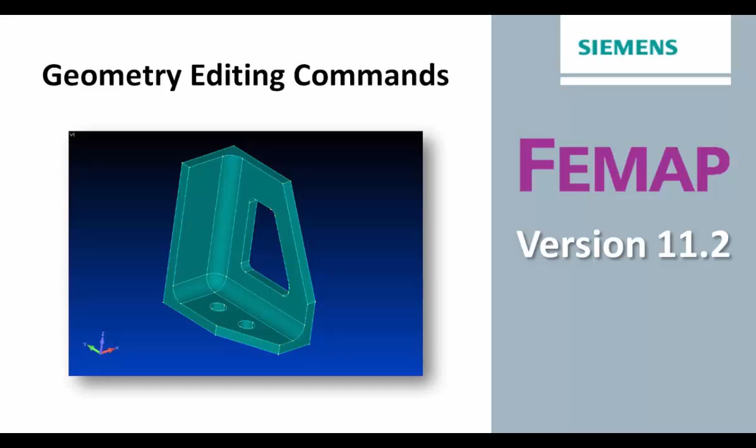This will be a short video covering some of the geometry update commands we've added to Femap version 11.2, using a very simple part from an older Femap example.

Under feature editing, we've added some new tools called Edit and Offset Surfaces. Edit will basically, on a planar surface, move it in the direction normal to the plane. On a cylindrical surface, it'll edit the radius, same thing for a spherical surface. And on blends or fillets, it'll actually allow you to edit the value of the blend.

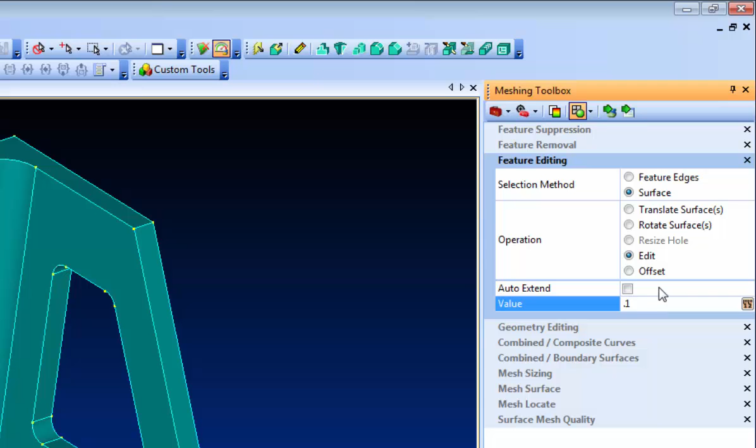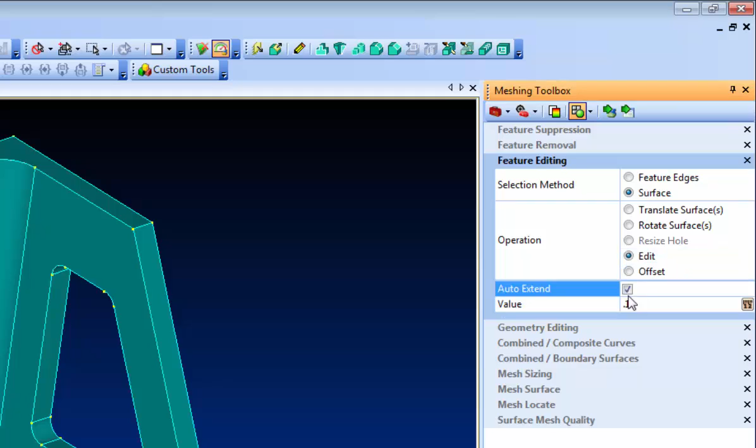There are two key things to look at here. There's an auto extend option, so let's do a quick example. Let's say I'm going to make the planar surfaces 0.1 thicker. If auto extend is off, it just picks one surface at a time. Going to front mode, you'll see one surface at a time doesn't make sense for a lot of things, though it comes in handy for other edits. So planar will just move that surface in a direction. If you turn on auto extend, it goes and gets all connected tangent surfaces and moves everybody together.

Same thing's true when editing a cylinder's radius. If this is turned off and I pick a cylindrical face, it shows me its current value, and you type in the new value. If you only pick one without auto extend, you do one at a time, so you get some interesting shapes. If auto extend is on, and this is set to 0.3, it will auto extend and change them both to 0.3 at one time. So with auto extend on, you get everything connected; with it off, you get just the one at a time. It's a pretty quick way to change blend radii.

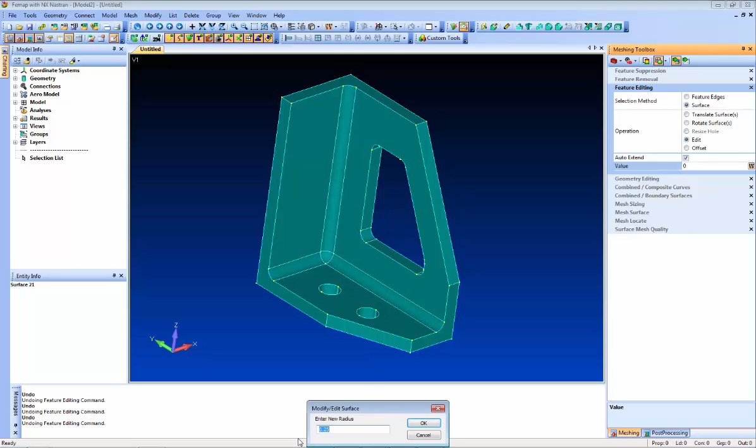I'll go back and make it 0, and when it's 0 and you pick a surface, it goes and gets its current value and asks for the new value. If I type in 0.25, the blends all update to 0.25. Now if I do it again, make it 0, pick one, it finds all its friends, and if I override and say I really want to make it 0, it's going to remove the blends. Now they're gone.

For a part like this, let's say you want to make it a little thinner. We can just edit, type in minus 0.1, and go pick that face, and that face. You see it's updating everything automatically.

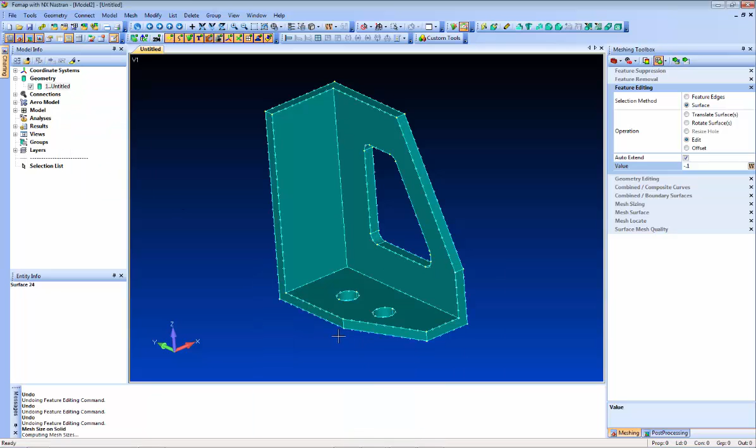Now remember, this is in the meshing toolbox. So if this part was actually meshed, I'll go ahead and mesh it with a dummy mesh. Setting the mesh size now, I'll say tet mesh. What material? Just pick something, we'll go aluminum. So now it's meshed.

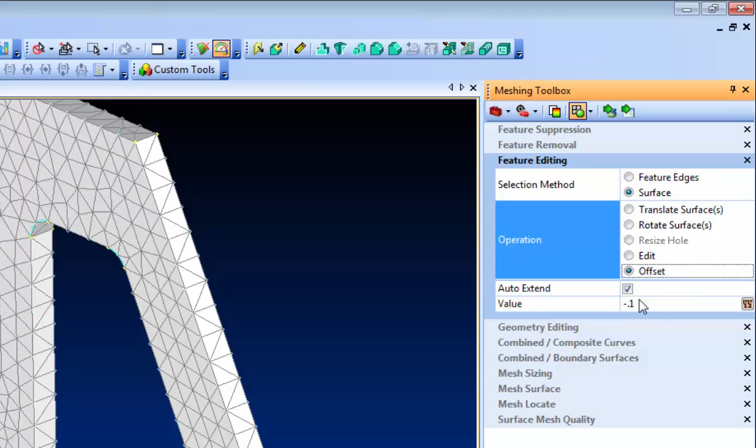Now in the meshing toolbox, I'll turn off the nodes to make it look a little nicer. The offset also works here - actually we haven't used offset yet, so let's turn on offset. We're going to offset minus 0.1, with auto extend on, so it will find everybody connected and offset them by minus 0.1. As part of the meshing toolbox, the mesh updates.

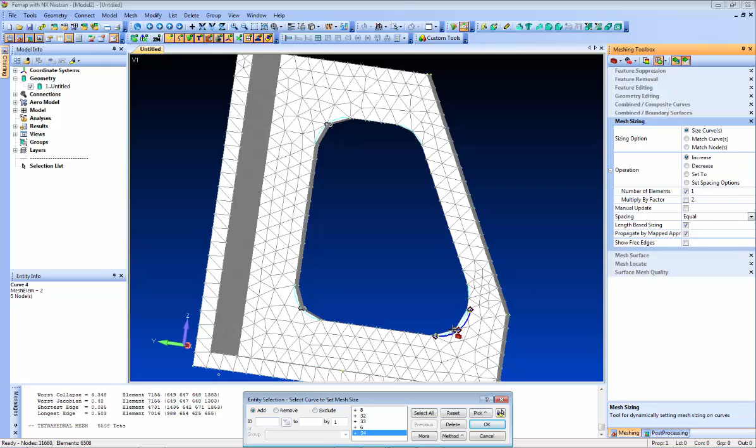Let's say you also want to increase the mesh sizing now that these blends got a little bigger. You can do that and just let the toolbox handle the automatic remeshing and things. It's a pretty quick way to change things around.

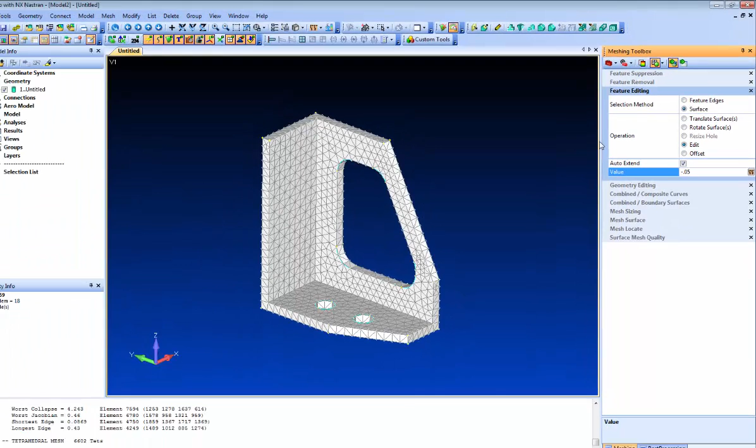Let's say you want to go thinner still, so we'll go back to feature editing and use edit with minus 0.05, and we'll make these flats a little thinner. Pick the inside. So you can see you can pretty quickly make some nice changes to solid models.